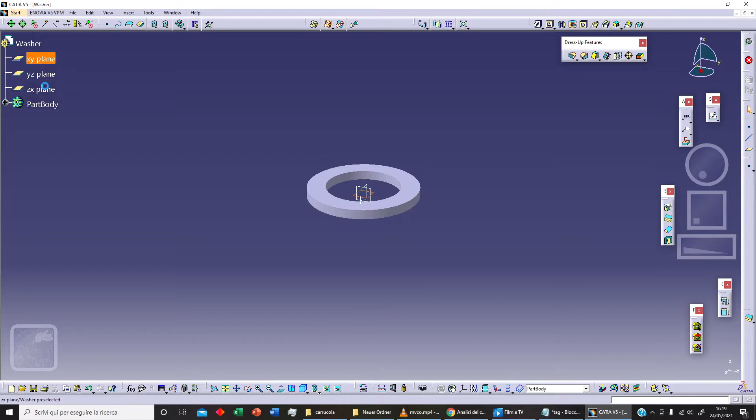Now we can extrude this and let's say 1 millimeter. Okay, we can hide our plane, hide and show, and we can add a material. As always, let's select painting and let's say orange washer and apply material, and let's click on OK.

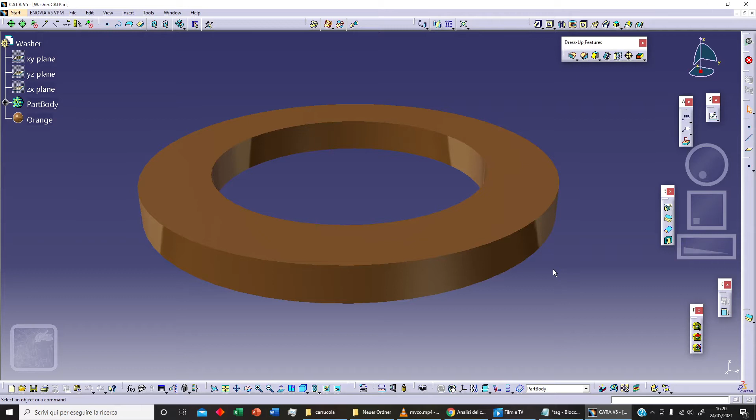Now let's select save as, and we can save this as a washer. Save and OK. I already saved this kind of element, and now we can sketch our second element. So we can close this and we can start with a new part. Let's say pin.

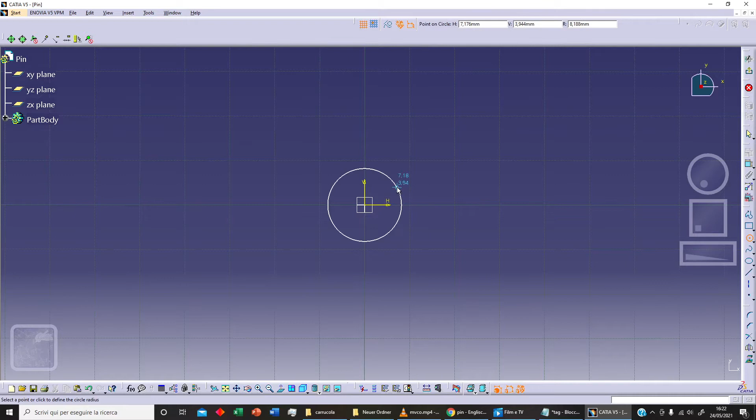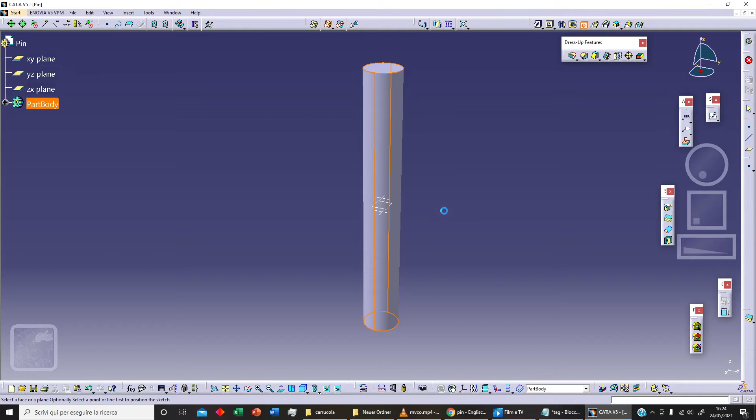Okay, we can select our XY plane, and on this plane we can sketch our circle and let's say 8 millimeters, and we can extrude this with our pad command, let's say 30 with mirror extent. Okay. Now we want to realize the hole on this surface here. Okay, and as extension, let's say up to next. As diameter, we can fix 2 millimeters.

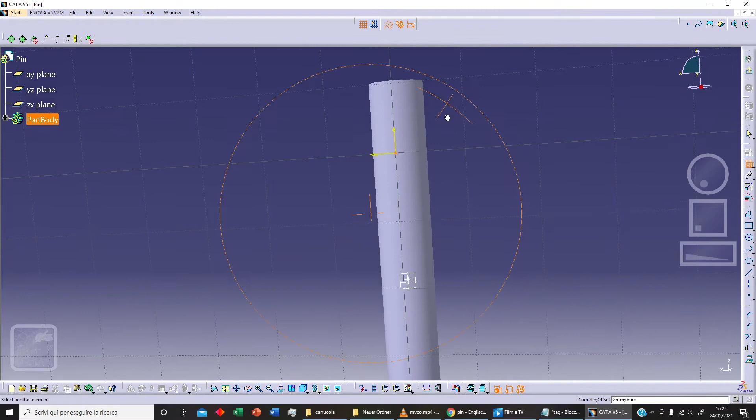We can select the position, and to sketch the position, as you can see here, we want to select coincidence between this and our YZ plane. Coincidence. Okay, and we can fix this distance here, point and this element here, let's say 6.75. Okay, we can exit workbench, and this is our hole. We can click OK.

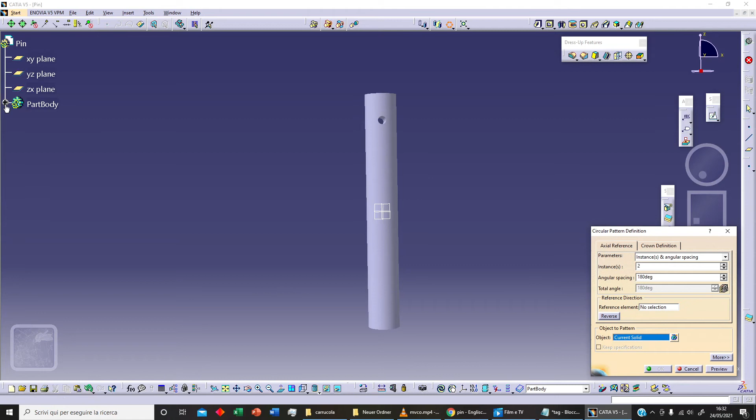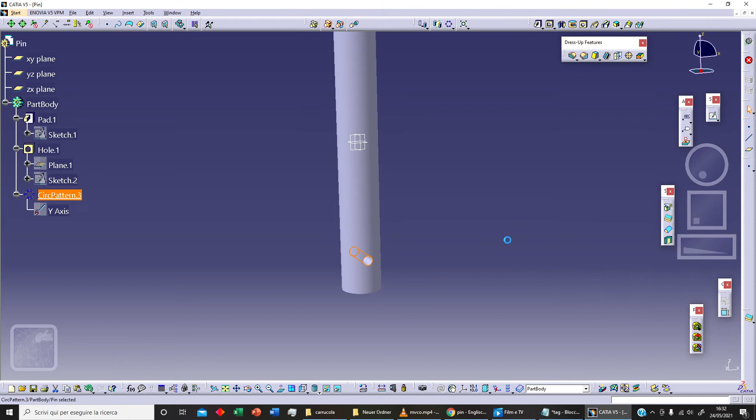Now we can select our mirror icon here, and as you can see, we've got a problem with this operation, so I can use, for example, this circular pattern. With our circular pattern, as element I want to select the hole, and we can specify complete crown. And as reference, as you can see here, we can use our y-axis. So let's select the y-axis and let's click on preview and OK. If you got a problem with this mirror operation, you can use this circular pattern.

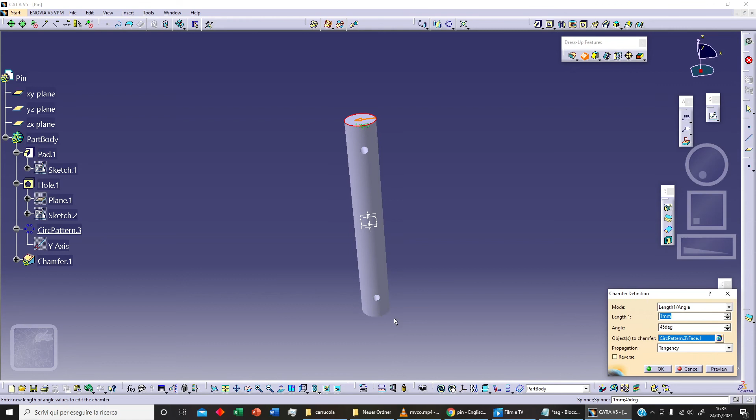Okay, and now we can use, for example, our chamfer, let's say 1 millimeter and as angle 45 degrees, and we can select this surface here and this surface here, click on preview and OK.